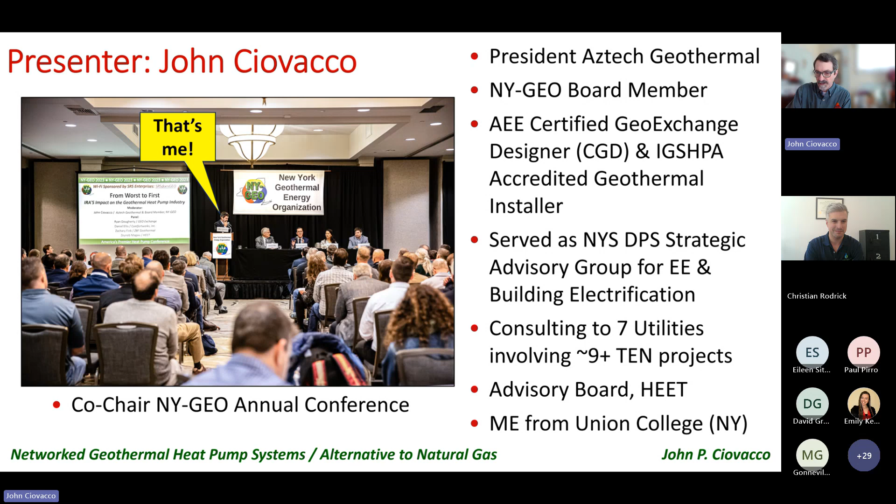So President of Aztech Geothermal, we're upstate New York, but do work all over the country when it comes to utility work. And I have — this is the 'I'm really famous' slide. I get up on stage and talk about these things.

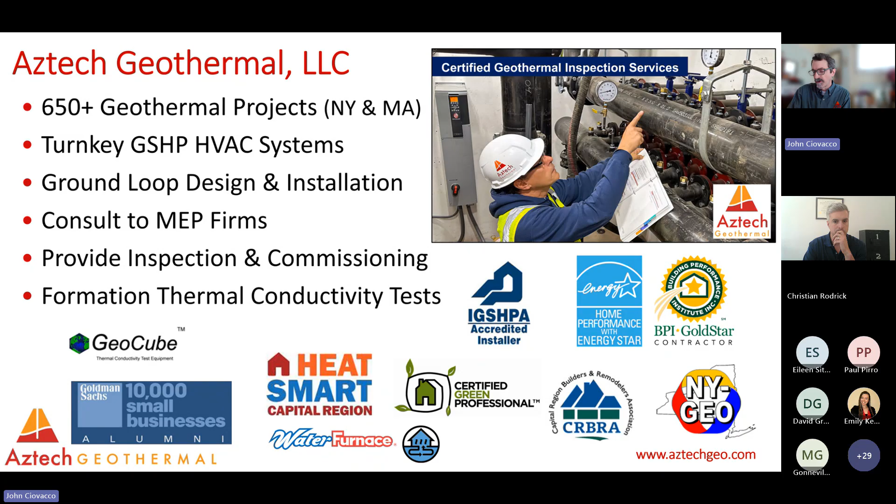You'll be provided this later. My company's done a lot of installation, a lot of turnkey work, so we have a lot of good hands-on experience. And then more recently, we're doing a lot of much larger building projects where we design and consult, and then also are working with about 7 utilities right now, which are considering the transition or alternatives to natural gas as a business model.

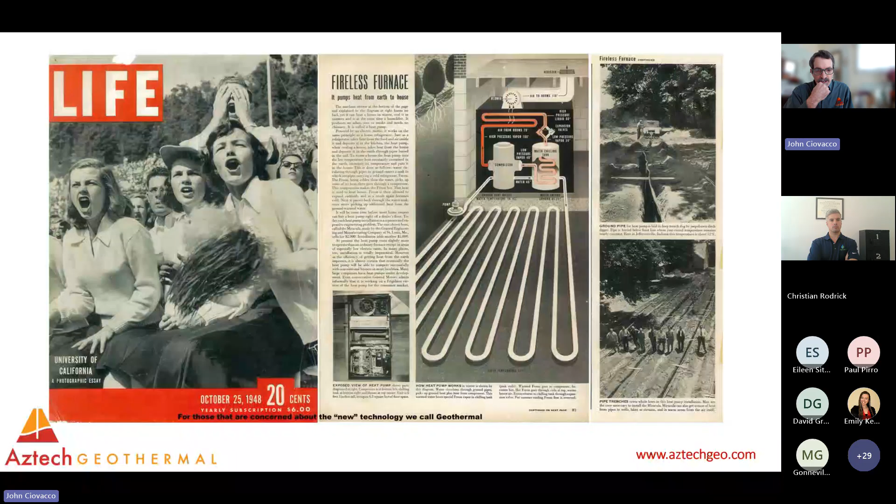So it's not a new technology. It's been around really since the beginning of refrigeration. This is just a funny Life magazine cover from 1948, the Miracula. And the Miracula was not that miraculous, but it was really cheap — only a couple thousand dollars, plus another thousand to install. So the numbers are nothing like that now, but the technology is really basically the same.

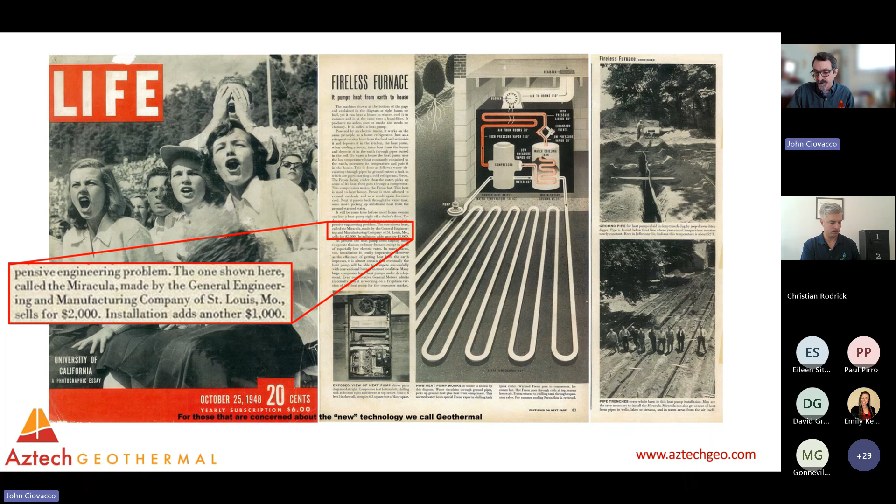It's refrigeration technology that leverages the ground instead of the air, which an air source heat pump might do, or a refrigerator in your kitchen might do. Where does the energy come from for most geothermal systems? The shallow ones that we deal with, where we're not going down trying to create steam to make electricity.

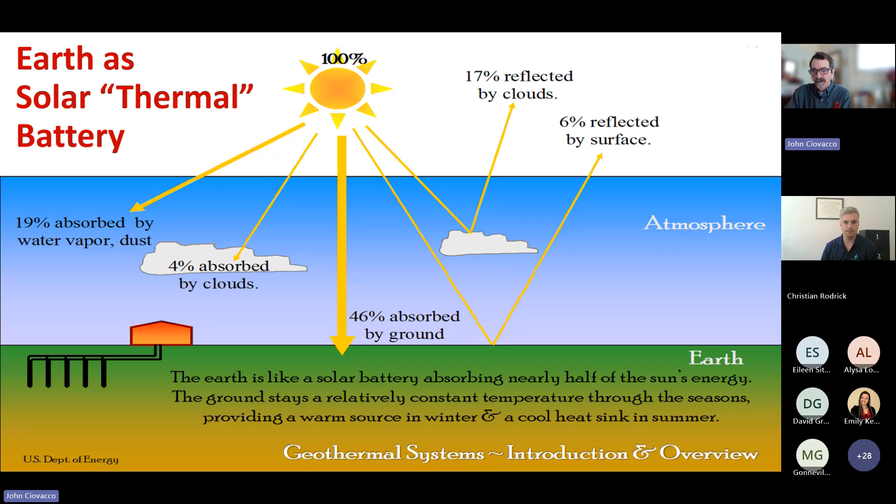We're more just trying to leverage the earth as a thermal battery, and that gets recharged in the summer, and then it gets depleted somewhat in the winter. The balance of that ends up being the mean ground temperature, undisturbed ground temperature that we access, which tends to be around 50 degrees - a good round number for a lot of the Northeast. It's a little bit lower in colder climates, and a little bit warmer elsewhere. It's kind of like what a cave temperature would be. So if you were in a cave in New York, it might be 52 degrees. If you were in a cave in Miami, which I don't know if they have caves, it might be 77 degrees. So it does affect the starting temperature that these systems are leveraging.

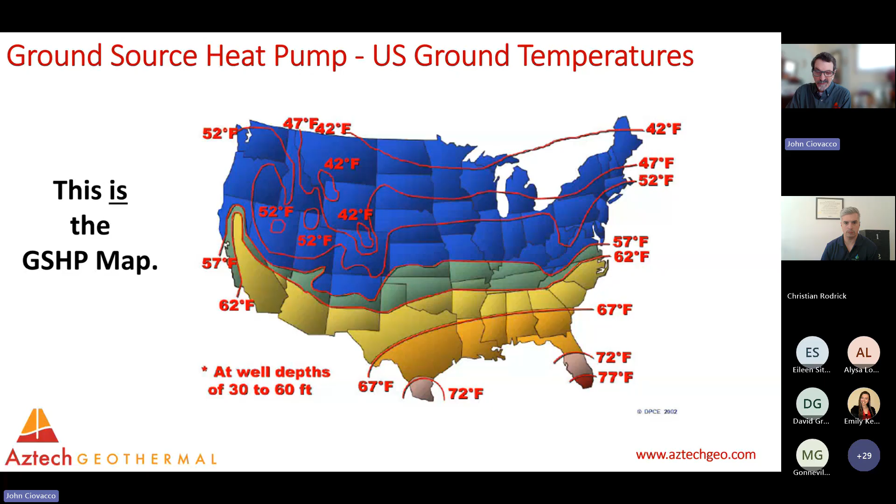Essentially, 52 degrees is pretty warm compared to really cold winter temperatures, and it's pretty cool compared to the summer. And so this is a technology that's going to leverage that.

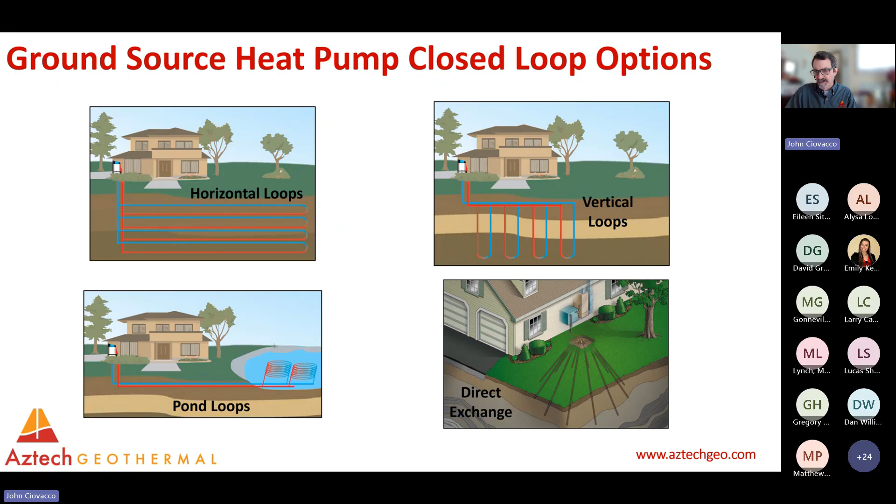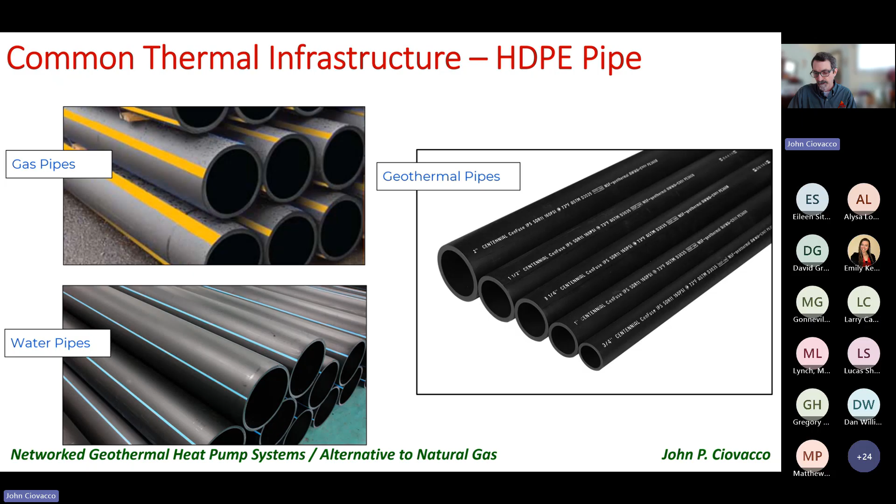One of the interesting things as we look at working with gas companies is that gas pipes, water pipes, geothermal pipes - kind of all the same pipes. SDR11 is a common one that we use, for those of you into the gas pipe vernacular. The fusion techniques and things are all basically the same. So that's the principal pipe used in our industry. It's not that it's the most thermally conductive or miraculous in that way, but it ends up not being the rate limiting factor. Actually, how fast temperature moves through the ground ends up being the limiting factor once the pipe equilibrates to that temperature, which is a longer story we don't have time for today. But it's plastic pipe that you're familiar with, I guess I would say.

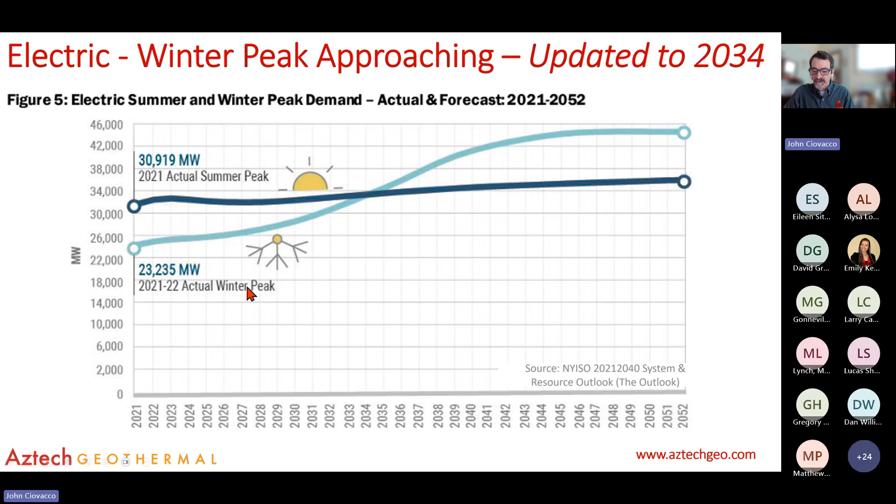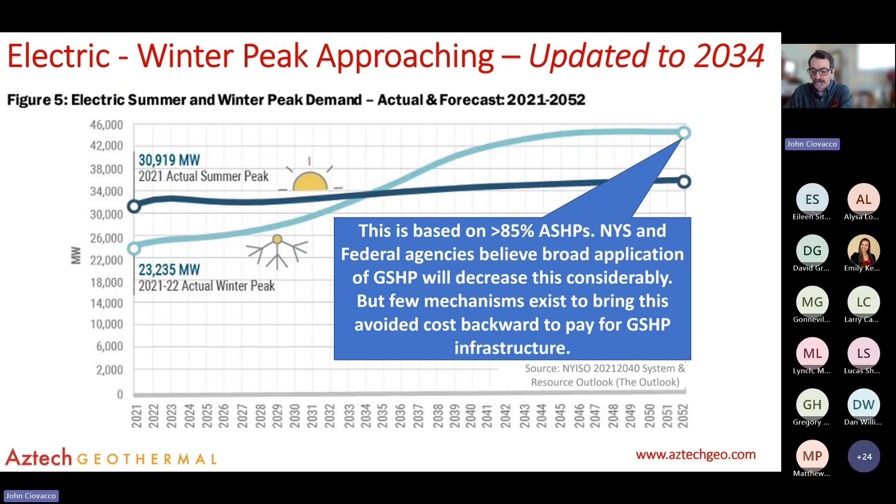So there's a lot of interest in trying to electrify buildings that use the least electricity. A lot of these assumptions are based on air source heat pumps. If you use ground source heat pumps, you mitigate a lot of that. I wouldn't say that we wouldn't get there eventually, or wouldn't go over the summer peak, but it certainly would happen later and it wouldn't be as great.

So that's all based on COP - coefficient of performance. If we want to electrify buildings with electric resistance, not that we would use a hairdryer or a toaster, but just to show you - this is essentially a COP of 1. That means for every kilowatt hour, I get 3,412 BTUs. And if I leverage with a heat pump, like an air source heat pump, then I might get twice that - I might get a COP of 2.

The good thing about that is it at least approaches, in many parts of the Northeast, cost neutral with natural gas heating. Now you might say that's not that awesome, because cost neutral also means no savings. But these are negative savings.

Certainly if we electrify buildings with electric resistance from natural gas or even propane, much, much worse. And then air source, we still have what are called negative savings - the customer would be paying more to heat. Ground source at least gets you level, and generally has mild savings.

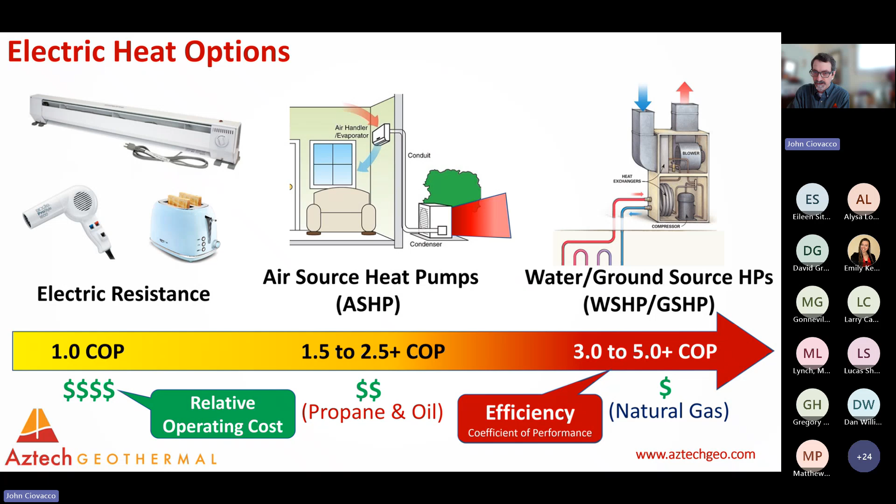But I guess we'll put it in the trust me category - it's like a refrigerator that reverses. It uses electricity, but it's most of the thermal energy when we're heating. 75% of the thermal energy we're heating with is from the ground, and 25% of it is from the compressor. So electricity through mechanical energy, in this case converted to mechanical, ends up being a certain portion of the energy that we use, but it's leveraging a much larger resource here, hence the higher efficiency.

So they're reversible, they have the reversing valve. They also can heat hot water - as you're heating the air, this is called the de-superheater approach. It can heat hot water. Some systems you can actually have them do 100% hot water, where it'll kind of alternate between heating the air and heating water. And then there's some that, when they're doing air conditioning, can heat water directly because it's essentially a byproduct of air conditioning - you're rejecting heat to the ground, and we can reject it to a water tank.

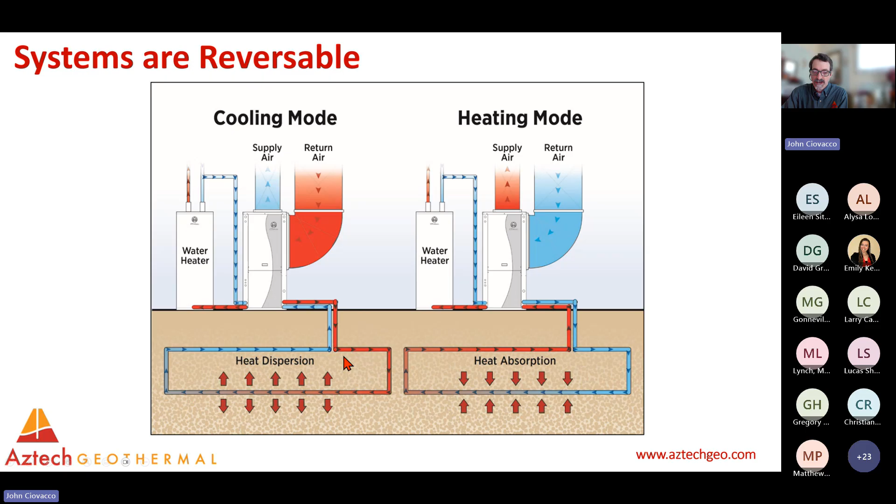This is ever changing and different for all of you that are in different areas, so I just have my assumptions here - you can plug in your own assumptions. But basically the electrification options are highlighted here versus some of the combustion fuel options at a given point in time. If you look at this, you might say, oh, that's not what we have - that's okay, good for you. But just understand that usually geothermal is cost competitive with natural gas, but not necessarily a big savings, and actually could be negative savings - this bar could be out more.

Air source heat pumps will almost always be a loser against natural gas in almost all markets. And then oil and propane are competitive with air source. And then electric resistance is probably not the way to go just about anywhere from a cost effectiveness standpoint.

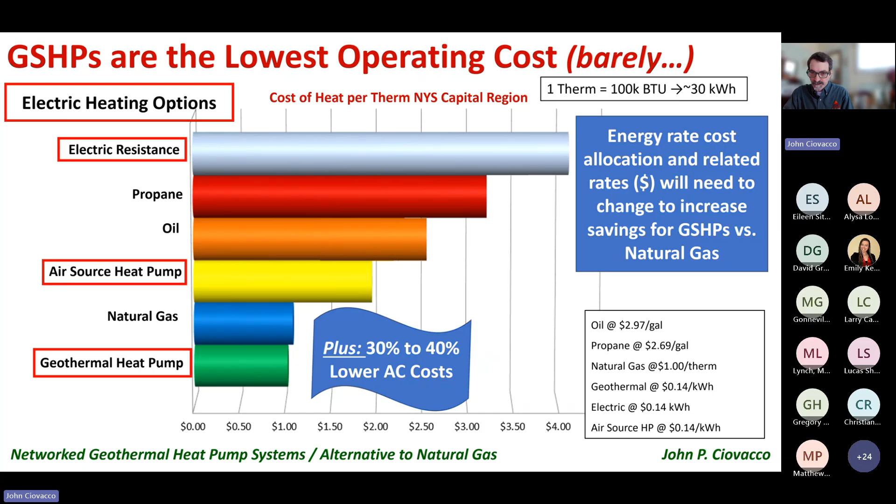Air conditioning - this is heating, but for air conditioning it depends a little on your location, but maybe it's 30 or 40% lower cost. It's lower cost really for folks that have central AC. If they didn't have central AC, which a lot of older buildings don't, and they just use window units, sometimes that larger central system, even at the high efficiency of a geothermal system, might actually have more cost for the air conditioning because they're air conditioning their whole house instead of a couple of rooms. So there's some nuances that we need to look at when we look at a bill impact analysis in converting customers.

This is just what's happening in New York. I know the most about that. We also work in Massachusetts, Colorado, and Minnesota.

The Utility Thermal Energy Network and Jobs Act, which some folks on the call are probably familiar with, led the 7 largest utilities in New York to do pilot projects as part of the law. In Massachusetts, which I don't have slides on, it was done more through rate cases, where proposals were made and approved by the DPU. So this has been driven a little more by a law.

There are a number of states, which I'll talk about later, that have laws passing requiring gas utilities to look into this as an option, as some of you know well.

This isn't the most updated, but it's kind of updated. I would say there are about 12, probably fewer than that right now, advancing in New York. These are pilot projects looking at a group of buildings, generally not campuses, though there are a couple of campuses in there.

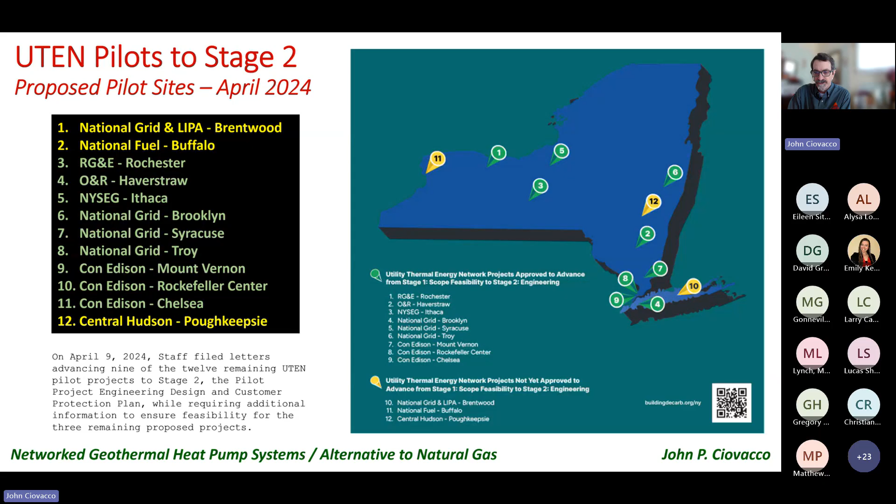So it would be buildings that are privately owned or separately owned, and the utilities are looking to run a geothermal network rather than a natural gas network as the thermal utility.

The way we're doing it in New York, we have a stage gate process. I'm not sure I would recommend it, but that's what we're doing. The good thing is it puts some order to it, and gives regulators a chance to assess what's going on at each stage and then move on.

The bad thing about it, from working through both this and a lot in Massachusetts, which is maybe the other alternative, is that in Massachusetts the rate case basically budgeted the ability to do the project essentially through to completion. There ended up being some changes to that, but essentially you knew you were doing the project.

You would go to a customer and say, hey, we have funding to do this, are you in? In New York, it's not as easy, because you basically get approved for funding at each stage. That also leads to a kind of hesitancy when discussing getting customers to sign up for these programs. So the order of it is nice.

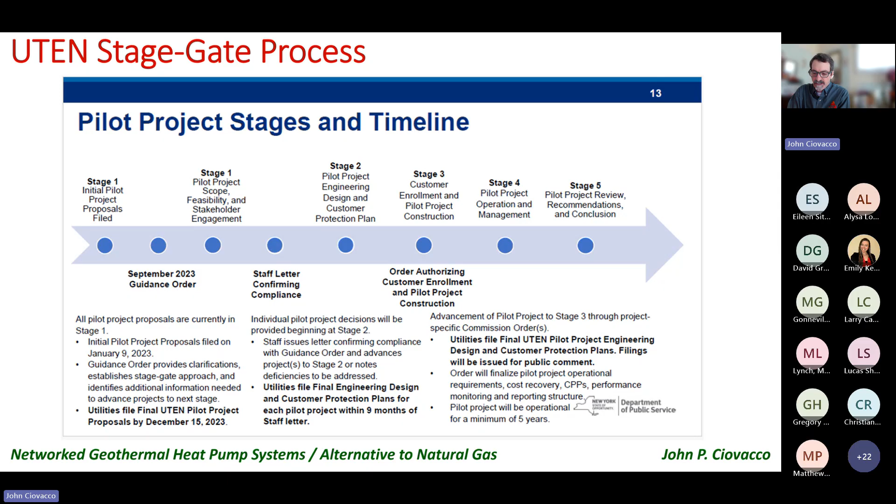Having the regulators learn how to create regulation around that, I think that's well thought through. The stage gates as a gate for funding, I think, is a problem, and makes it difficult to get the customer engagement in the way we've been able to do in Massachusetts.

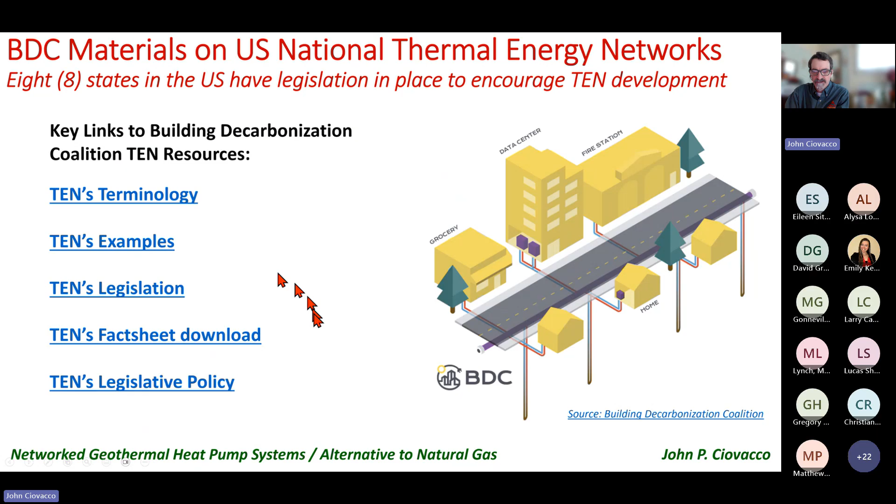The BDC, the Building Decarbonization Coalition, probably has the best resources to get a grip on the terminology, examples, and legislation—they've got great stuff. They even have a resource map showing where all these thermal energy networks are located in North America, with facts about each one. It's mostly the US and Canada, but it's cool stuff to poke around on if you want more information about what's going on.

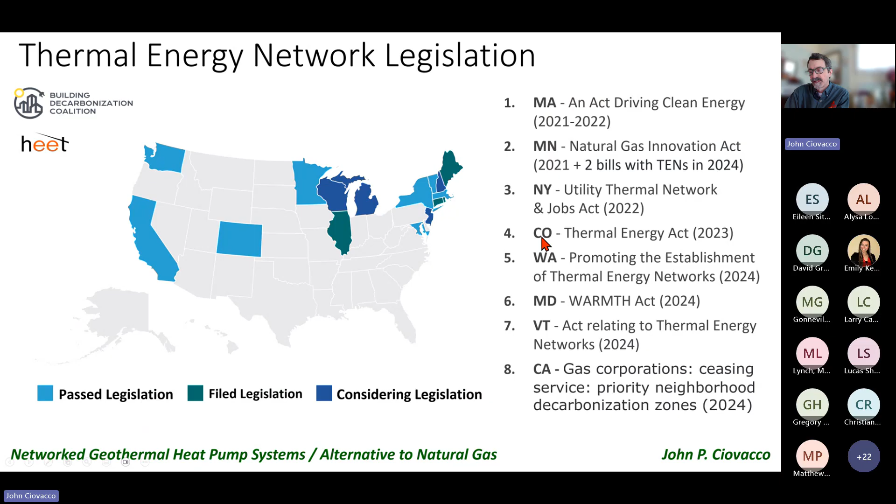Some of that information is here. There are 8 states that have thermal energy network legislation in place, I believe. Some might be pending as bills, but I think they're in place. Some of you are subject to some of these, so you're familiar with the ones in your area. But there's definitely a trend—looking at New England, a lot of those states have some level of this going on.

So let's talk a little bit about where these make sense, where they don't make sense, maybe how to think about it. But before we jump into this next question, and maybe you'll answer this later, we got one question.

Did you say that air conditioning costs may be higher with geothermal compared to room air conditioning? Could you explain that a little bit more?

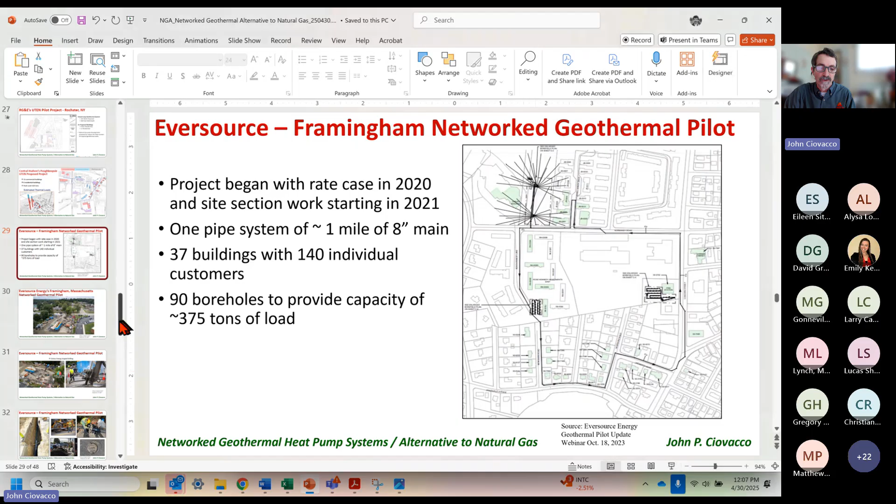When you put a central air conditioning system in a house, people use it because it's lovely—it dehumidifies the house, it makes the house pleasant. They have this sense that it's going to be really efficient, so they think it won't cost more, but it can certainly cost more than just adding the kilowatt hours for 10 nights a year in two bedrooms. So it isn't that the system is less efficient and that leads to higher expenses—it's that they're conditioning more space more often than they were previously. Does that make sense?

Yeah, that's great, thank you. It's a nuance—when you do bill impact analysis, you really need to know what that building is doing and how the geothermal system will affect it. So the bill impact analysis is reasonably intimate and sophisticated to try to get it accurate for heating and cooling and domestic hot water, which is another set of electrification challenges you need to look at.

So John, the cost you're paying when you talk about cost—yep, it's based off the pump, on electric cost, because you're getting the transfer of free heat from the ground. So is it just more the pump cost, that's the difference? Yeah, the majority of the cost comes from the compressor—you need to run a compressor.

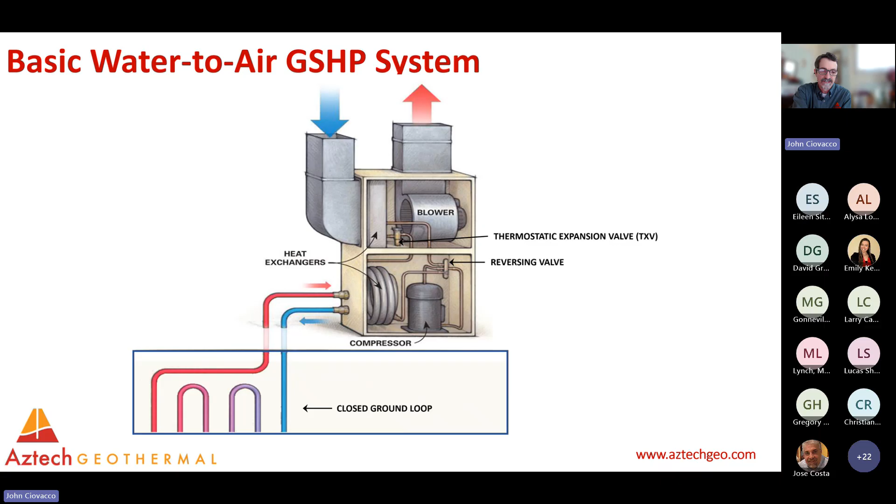Just as we've all probably experienced, if you're older especially, you've driven in a car where when you turn the air conditioning on, the whole car kind of lurches a little because it's a big load. Compressors eat a lot of electricity—same with air source heat pumps or any air conditioner. It's basically an air conditioner, really identical technology to air conditioning, and that's where the electric consumption comes from. That's the same in an air source heat pump too.

So where does it make sense? It's kind of just a rule I have that if you have commonly owned land and buildings, that's a good start, like a campus. But that's not the reality for most of the folks on the call, probably—you have customers that own their land, and they're not all campuses, of course.

The second factor that's nice to have is a diversity of load, meaning you have buildings doing different things at different times, so you can balance the thermal load. What is not diverse? A neighborhood where all the homes are exactly the same size—that's not diverse, they're going to basically be heating at the same time, cooling at the same time. So that's something to consider.

So we like to have interesting buildings, different ones, and then buildings need to be pretty close to each other. How close? Just recognize it's a very different way to think—the energy we need to heat and cool buildings, most of that energy is resident right next to the building. It could be under the building in certain cases, but generally right on the property, or in the case of a utility, it might be in the neighborhood, or a nearby parking lot or something we access it from.

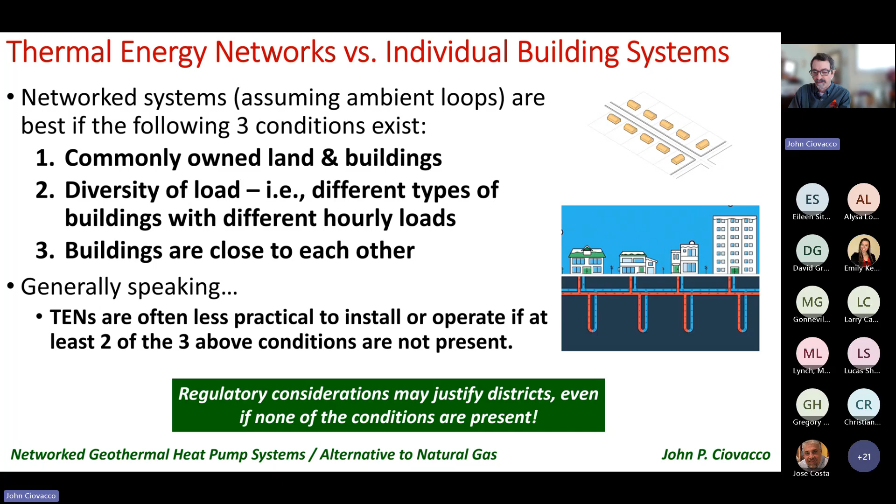In most areas that I'm familiar with, the utilities really haven't been granted, from a regulated standpoint, the ability to do individual building geothermal; they've really been largely required to only engage in networks. And again, that kind of gets us far afield, but I certainly am in conversations about that regularly.

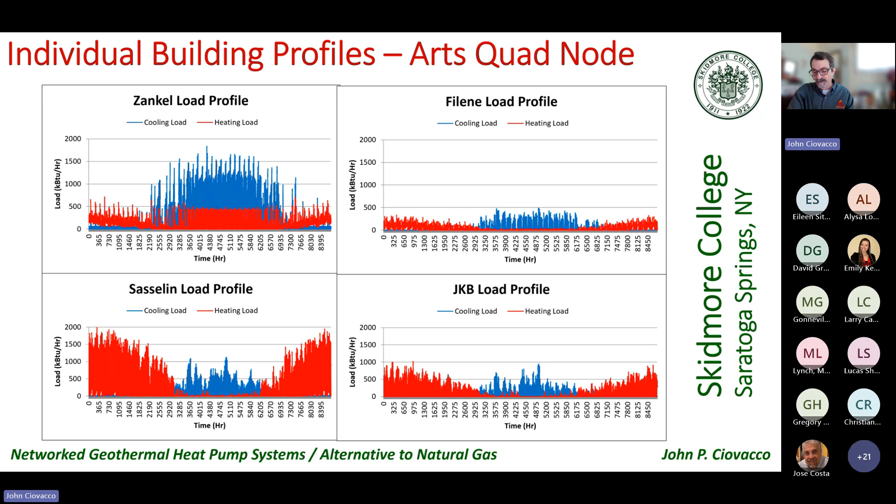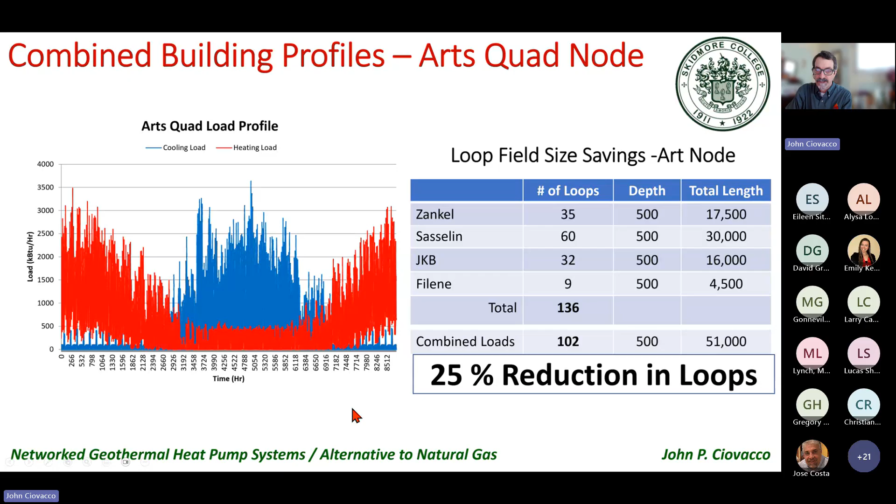And you can reduce your number of boreholes, your source energy that you need to make that investment, by say 25%. You might be able to reduce it more than that, depending on the diversity of load, because the buildings complement each other and basically share energy, rather than new energy needing to be produced each time. So that's what we mean by diversity of load.

These networks, there's 3 thermal components to it. We need to convert the buildings. This is often the largest single expense, more expensive than these 2 combined, which we'll talk about. So buildings need to be insulated. They need to be air sealed often. They need electrical upgrades. So there's things that might need to happen here, and that can be a big expense. That would be true if it was an air source system as well. It's not specific to geothermal. So as we electrify buildings, this is expensive.

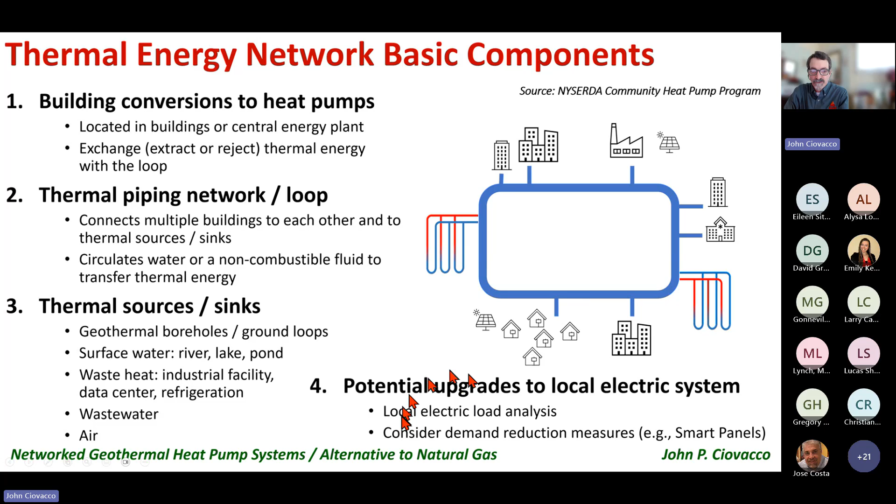So depending on how you electrify these buildings, there's a reasonable chance that they might need an electrical upgrade, and having a bunch of buildings that are now electrified, especially as we electrify everything, the stove, the dryer, the water heater, we need to do some good analysis of that area to make sure that the area is ready to take it. Plus, we should consider demand reduction measures when we design these buildings, like smart panels that might manage the loads of even small buildings to make sure that we don't overload or have to significantly upgrade the local electric network. Now, you're on the gas side of it. Some of you are also on the electric side of it, but you can't ignore this because you could end up with a big problem, of course.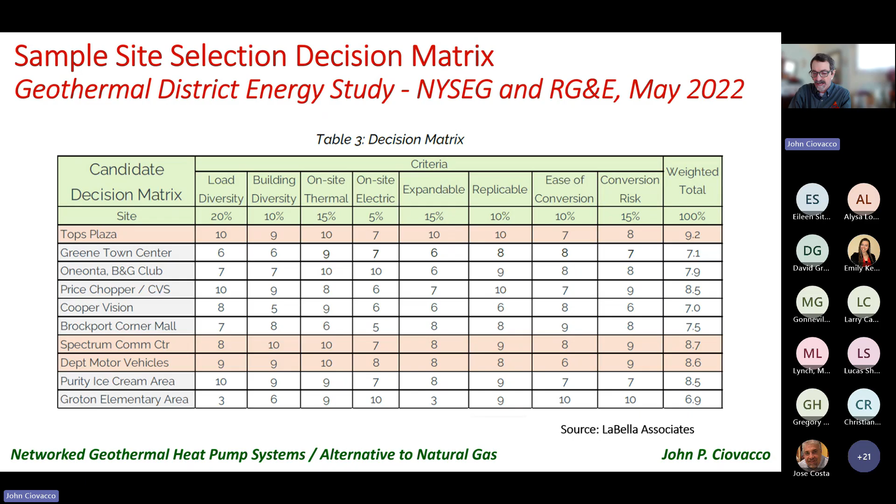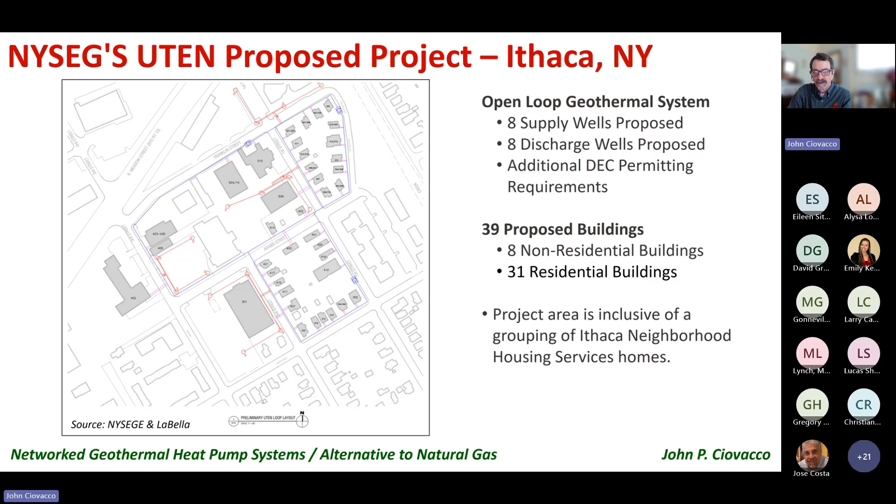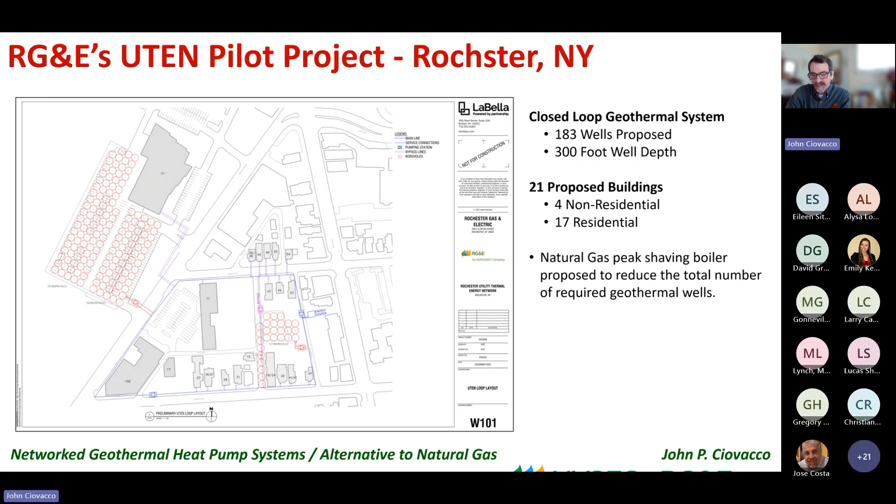This is a project that I'm not sure will go forward, but interesting in that these are more centralized bore fields. So each of these is listed as 300 feet. I think they're going to be deeper than that, but this is concentrated in a parking lot at a big commercial building, and then another source over here in some smaller parking lot areas, and then the network between all of these buildings listed here. So looking for some level of diversity again. So different types of buildings, different size buildings.

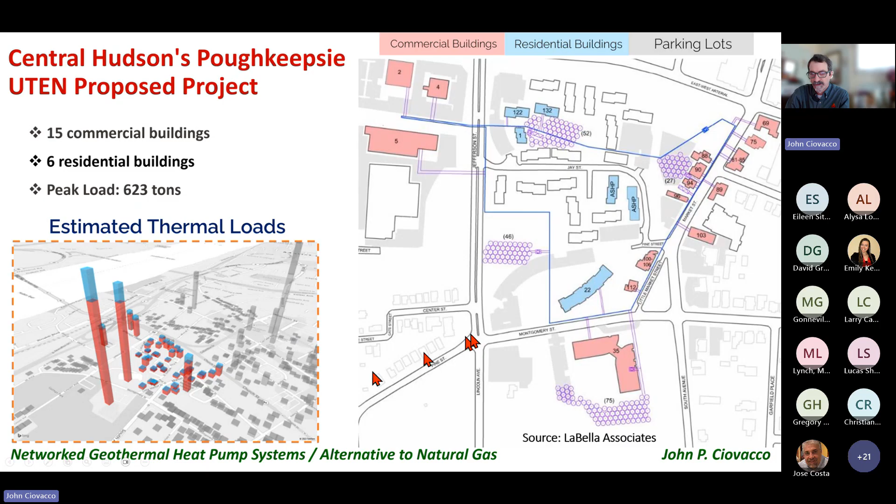This is in Poughkeepsie, New York. Got 4 bore fields. We probably will end up with 3 bore fields, would be my guess. The piping goes between all the buildings. And again, you can see there are different types of buildings, which is advantageous. These are the loads of those buildings in 3 dimensions to show the heating and cooling of those buildings and their relativity. So some of them have quite small loads, some of them have much larger loads, but that's good. We want to have a mix of that kind of thing.

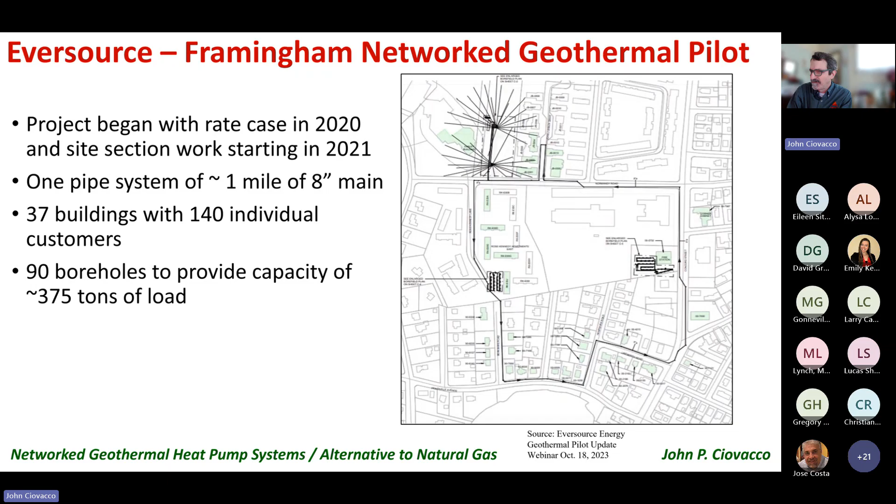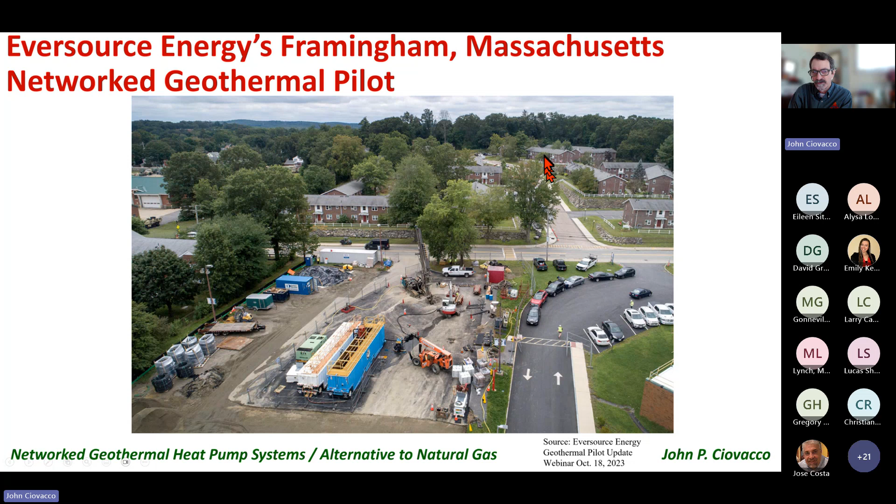And then there's an 8-inch pipe that goes for about a mile underneath, and then it's about 5 feet top of pipe, I think, on this one. And I have some pictures of that installation. So this is where the angled bores are in the Framingham project. And then the 8-inch pipe goes out over in these directions here. This is more about the drilling.

This shows one of the main pipes being installed. It's that 8-inch SDR11. And so they did it in 40-foot lengths. So they butt fused two 20-foot sticks together and then dropped them in and electrofused to the connection from yesterday. This was a gas piping contractor that did it and used the same personnel, the same equipment that you would use for gas essentially to do it. So certainly a good demonstration of some of the similarities between these types of utilities.

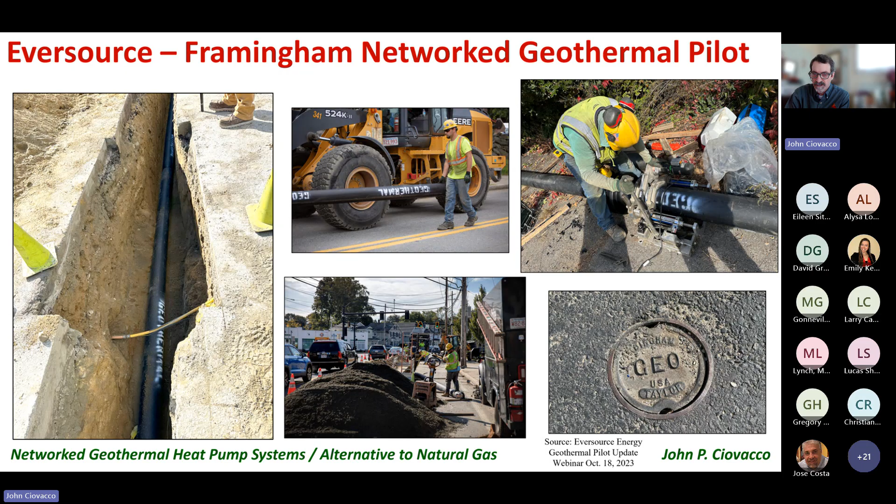There are other ways, two-pipe systems, which would have a more fair distribution of energy to all the buildings. But the problem with those is it's difficult to get two pipes in the street, especially in existing areas and into cities. So the single pipe is most of the projects that we're engaged with. And then we keep a very tight temperature between the houses. So basically the whole thing is sized based on keeping the delta T low, the change in temperature from one building to the next low, so that everybody gets a shot at about the same amount of energy that comes in. Metering is very difficult in these situations.

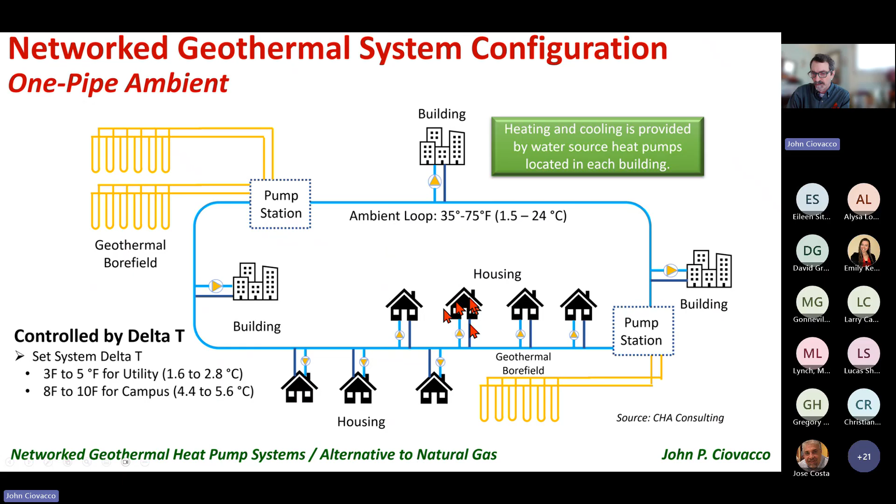The change in temperatures are not that great, so it's difficult to get metering equipment that measures very accurately. So it's flow and temperature that you need to measure, and both of those vary quite a lot when you optimize these systems, and the accuracy of those is tough. The utility can do it. You can do it in the pump station. You've got larger amounts of flow. You can control your change in temperature better. But to meter individual small homes, for instance, is actually pretty tough. And there's no real standard for it yet.

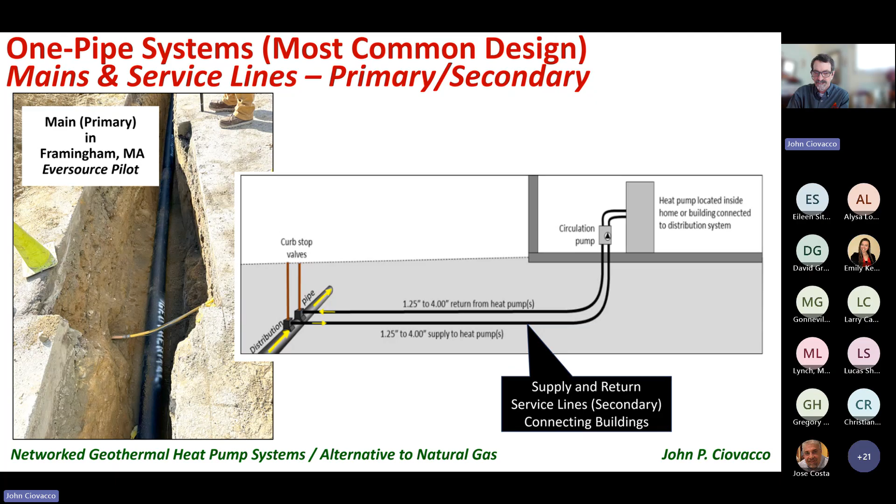This is just another diagram that kind of shows this would be the circulator inside the building, and it would pull the water off the main and then put it back into the main, while the main is pushing water around to each of the buildings. John, how deep is that main? This is 5 feet top of pipe. And we did a sensitivity analysis on this. 6 feet's a little better, but then you're into safety stuff more. You could make it shallower, but then you would need to increase the amount of antifreeze that you put in, which then has a negative impact on the system. Longer story, but that's the quick.

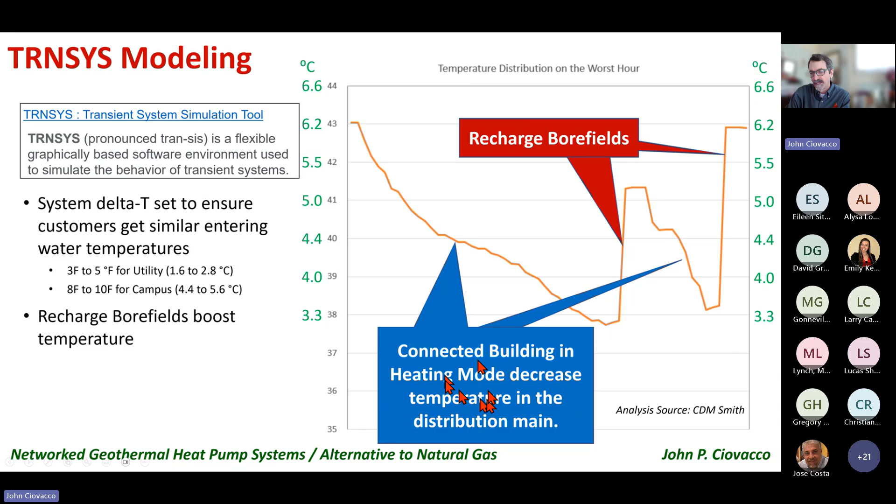This is a modeling software, so the buildings are pulling energy off of here. It's getting lower and lower temperature, and then it goes to a bore field. So it recharges it, and then again, it pulls energy off another bore field. So recharge bore fields. And then these are areas of connected buildings. This is another example of that. In the summer, you'll see that it gets hotter and hotter, and then a bore field cools it down. It kind of recharges it, pulls energy out, and then again, it gets hotter, and then we pull it down. In the winter, same thing, getting colder and colder. That same bore field pulls it up. So we're leveraging that constant temperature of the earth to keep the temperature that gets distributed to all the buildings relatively even.

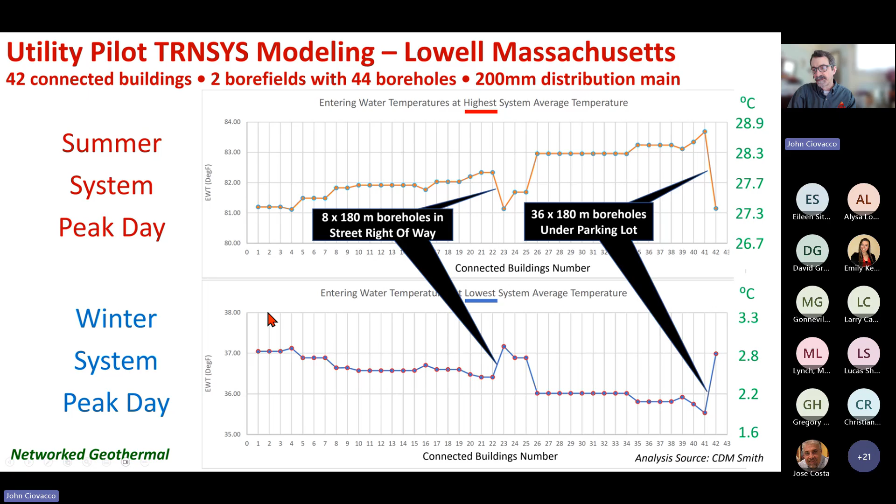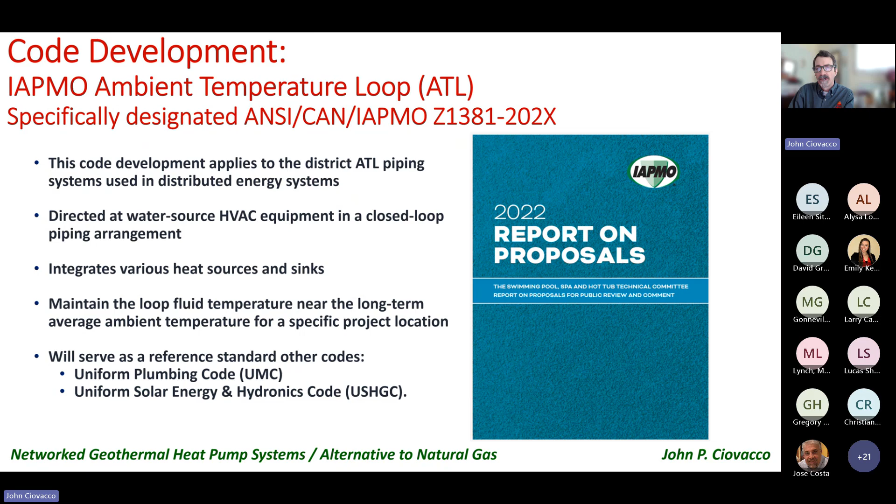I'm just going to mostly show you these so we can leave some time for questions. There are standards that are out there, and new standards coming out soon. There's some code development that's going on right now for these types of systems. There are software programs that we use commonly to design these types of systems. And again, this is a takeaway for everybody. We do formation thermal conductivity tests, so we can drill a borehole and we can test how the ground will give us energy, how it absorbs energy over a 48-hour period.